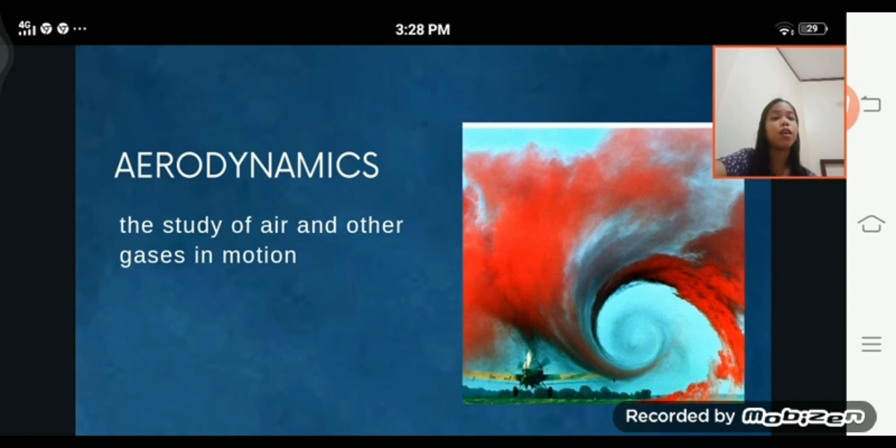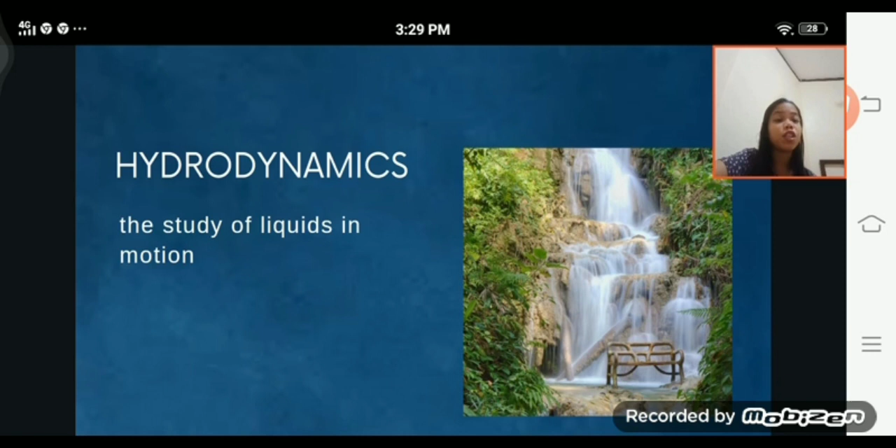Now we have the second one, hydrodynamics. It is the study of liquids in motion. As you can see in the picture, it is the study of liquids such as water in motion.

So now we have here flow, the term that physicists use to describe the physical properties of the movement of liquid. Since fluid dynamics involves the study of the motion of liquid, one of the first concepts that must be understood is how physicists quantify that movement.

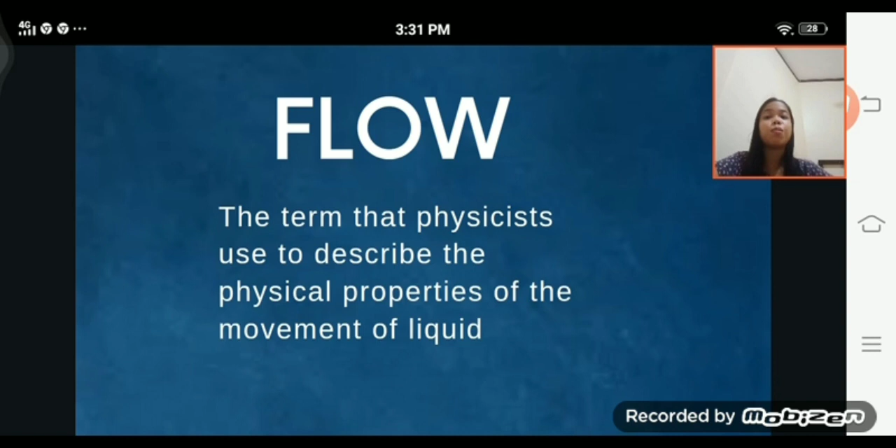Flow describes a wide range of fluid movements, such as blowing through the air, flowing through a pipe, or running along a surface. The flow of fluid is classified in a variety of different ways based upon the various properties of the flow.

We have here the first property, steady versus unsteady flow. When we say steady, if the movement of fluid does not change over time, it is considered a steady flow. This is determined by the situation where all properties of the flow remain constant with respect to time, or alternately can be described by saying that the time derivatives of the flow field vanish.

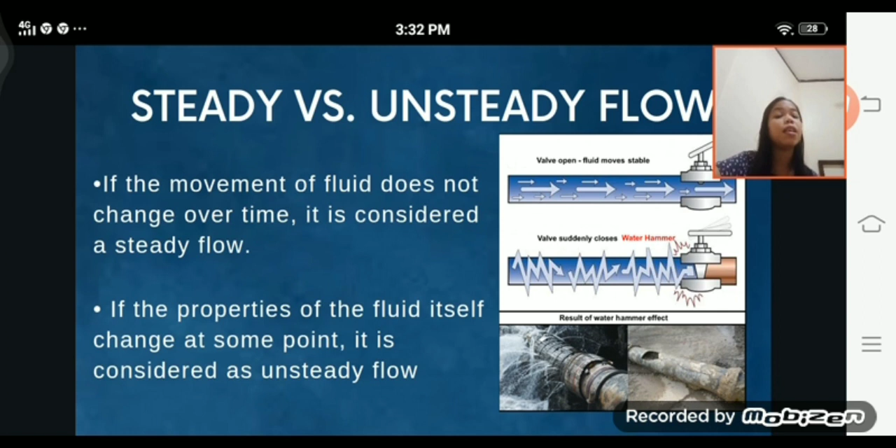If the properties of the fluid itself change at some point, it is considered unsteady flow. This is the opposite of steady flow.

Now we have the next, laminar flow versus turbulent flow. A smooth flow of liquid is said to have laminar flow. Flow that contains seemingly nonlinear motion is said to have turbulent flow.

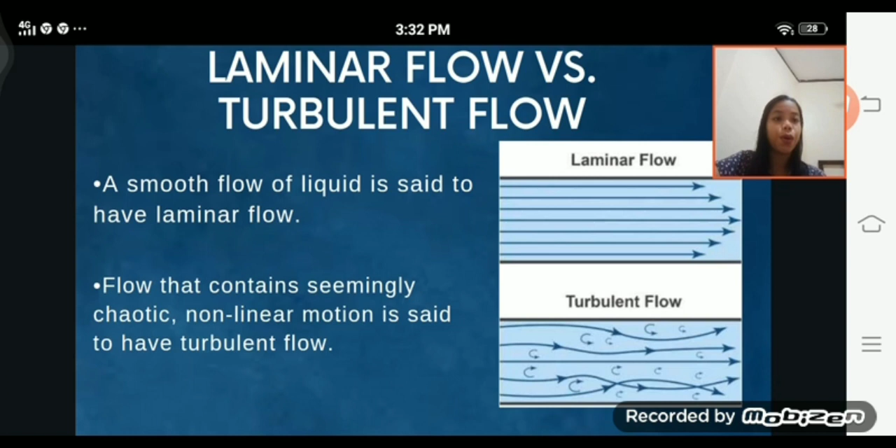Now we have pipe flow versus open channel flow. Pipe flow represents a flow that is in contact with rigid boundaries on all sides, such as water moving through a pipe or air moving through an air duct. Open channel flow describes flow in situations where there is at least one free surface that is not in contact with a rigid boundary.

Cases of open channel flow include water moving through a river, floods, water flowing during rain, tidal currents, and irrigation canals.

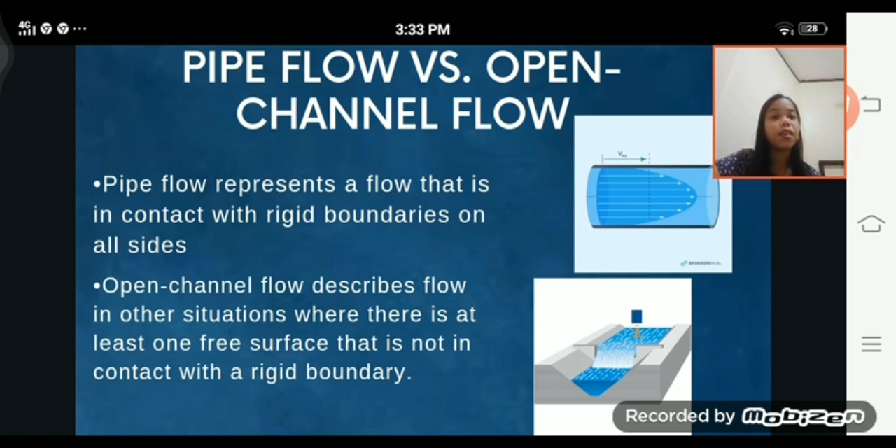Now we have compressible versus incompressible. A compressible fluid is one in which the fluid density changes when subjected to high pressure gradients. An incompressible fluid is a fluid which is not compressed or expanded, and its volume is always constant. As you can see in the picture, the liquid is an incompressible fluid, while the gas is a compressible fluid.

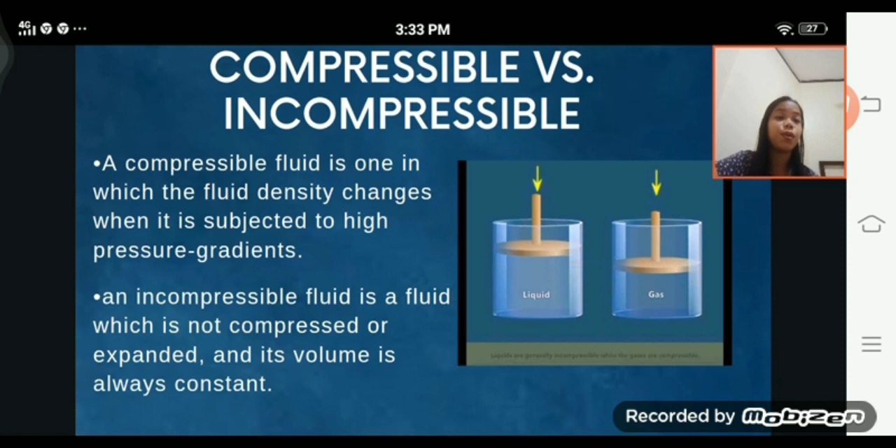Now let's proceed to the applications of fluid dynamics. Two-thirds of the Earth's surface is water, and the planet is surrounded by layers of atmosphere. So we are literally surrounded at all times by fluids, almost always in motion.

Here are the following applications of fluid dynamics: oceanography, meteorology, and climate science. Since the atmosphere is modeled as fluids, the study of atmospheric science and ocean currents, crucial for understanding and predicting weather patterns and climate trends, relies heavily on fluid dynamics.

Now we have aeronautics. The physics of fluid dynamics involves studying the flow of air to create drag and lift, which in turn generate the forces that allow heavier than air flight.

Next, we have geology and geophysics. Plate tectonics involves studying the motion of the heated matter within the liquid core of the Earth.

We have hematology and hemodynamics. The biological study of blood includes the study of its circulation through blood vessels, and the blood circulation can be modeled using the methods of fluid dynamics.

Now we have plasma physics. Though neither a liquid nor a gas, plasma often behaves in ways that are similar to fluids, so it can also be modeled using fluid dynamics.

Now we have astrophysics and cosmology. The process of stellar evolution involves the change of stars over time, which can be understood by studying how the plasma that composes the stars flows and interacts within the star over time.

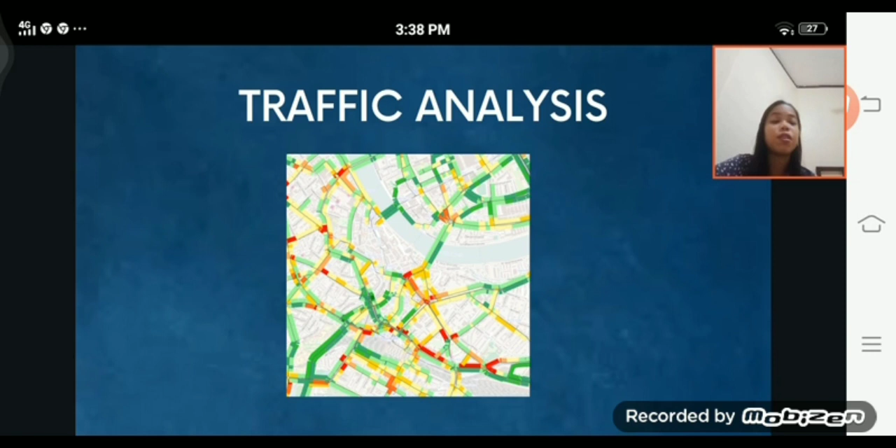Now let's proceed to Bernoulli's principle. Why do we need to learn Bernoulli's principle, and what is its connection to fluid dynamics? Bernoulli's principle, sometimes also called the Bernoulli effect, is one of the most important results in the study of fluid dynamics, relating the speed of the fluid flow to the fluid pressure. This might not seem particularly important, but given the huge range of phenomena it helps explain, this simple rule can reveal a lot about the behavior of a system.

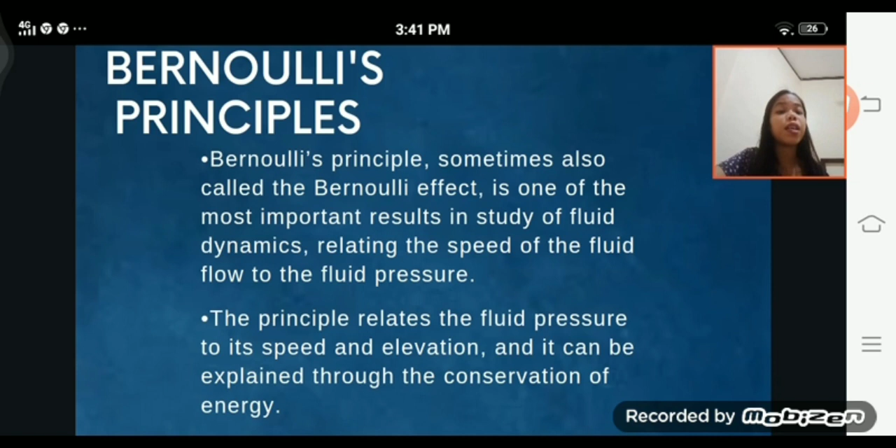Fluid dynamics is the study of moving fluid, so it makes sense that the principle and its accompanying equation, the Bernoulli equation, comes up quite regularly in the field. As I said earlier, Bernoulli's principle relates the fluid pressure, its speed, and elevation, and it can be explained through the conservation of energy.

Bernoulli's principle: within a horizontal flow of fluid, points of higher fluid speed will have less pressure than points of slower speed. So within a horizontal water pipe that changes diameter, regions where the water is moving fast will have less pressure than where the water is moving slow. This sounds counterintuitive to many people, since people associate high speeds with high pressure.

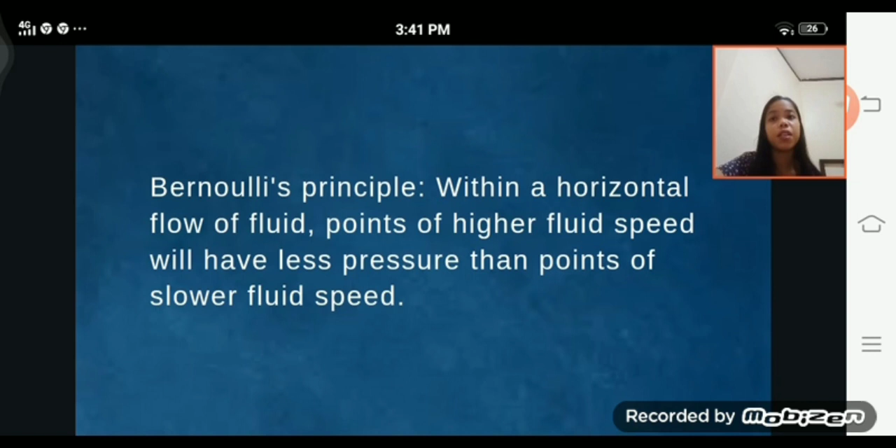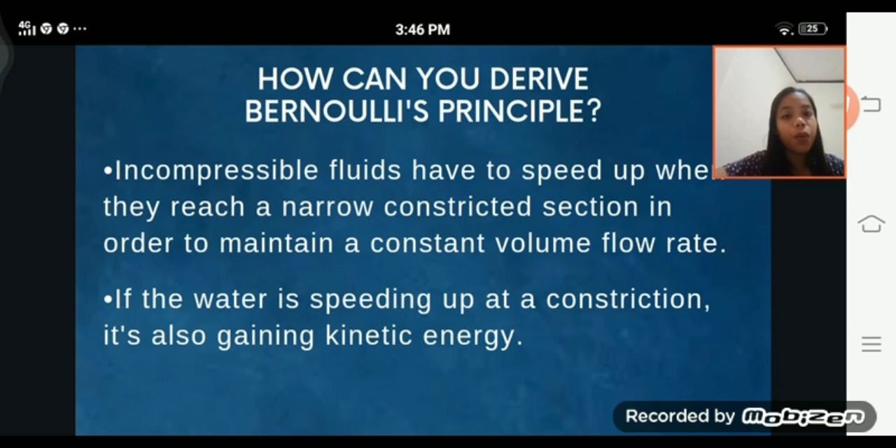Now let's talk about how you can derive Bernoulli's principle. Incompressible fluids have to speed up when they reach a narrow constricted section in order to maintain a constant volume flow rate. So if the water is speeding up at a constriction, it's also gaining kinetic energy, and the only way to give something kinetic energy is to do work on it. This is expressed by the work-energy principle.

Work external equals delta K equals one half mass times final velocity squared minus one half mass times initial velocity squared. So that's the work-energy principle.

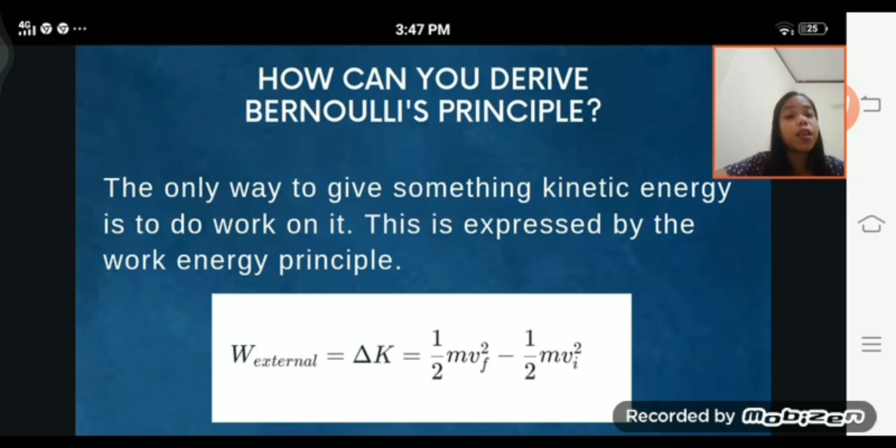So if a portion of fluid is speeding up, something external to that portion of fluid must be doing work. So what force is causing work to be done on the fluid? Consider the diagram below here.

The diagram below shows water flowing along streamlines from left to right. As the outlined volume of water enters the constricted region, it speeds up. The force from pressure 1 on the left side pushes the shaded water to the right and does positive work, since it pushes in the same direction as the motion of the shaded fluid.

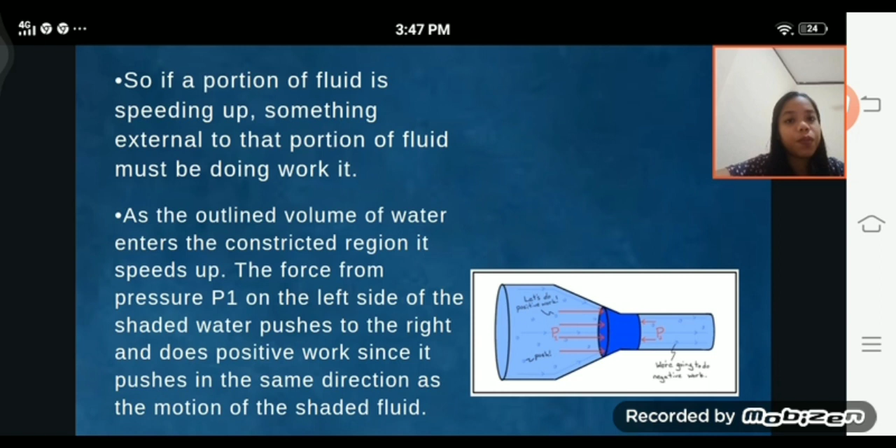Now let's proceed to what is Bernoulli's equation. Bernoulli's equation is essentially a more general and mathematical form of Bernoulli's principle that also takes into account changes in gravitational potential energy. We'll derive this equation in the next section, but before we do, let's take a look at Bernoulli's equation and get a feel for what it says and how we'd go about using it.

Bernoulli's equation relates the pressure, speed, and height of any 2 points in a steady, streamlined flowing fluid of density. It is usually written as: pressure 1 plus 1/2 density times velocity 1 squared plus density times g times height 1 equals pressure 2 plus 1/2 density times velocity 2 squared plus density times g times height 2.

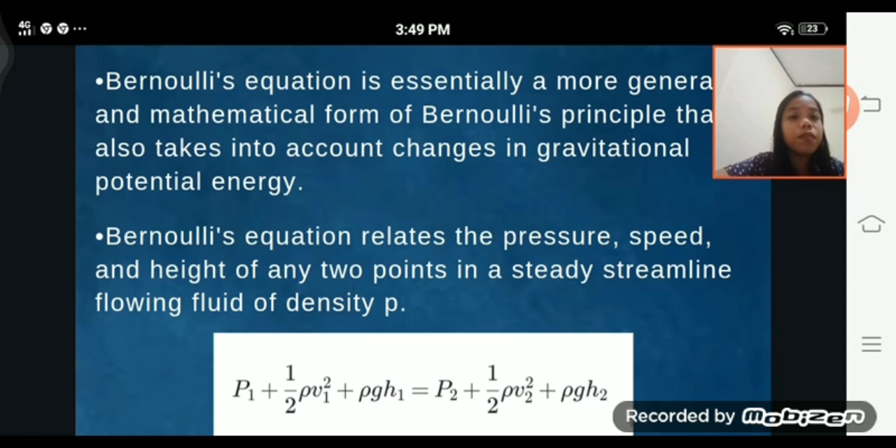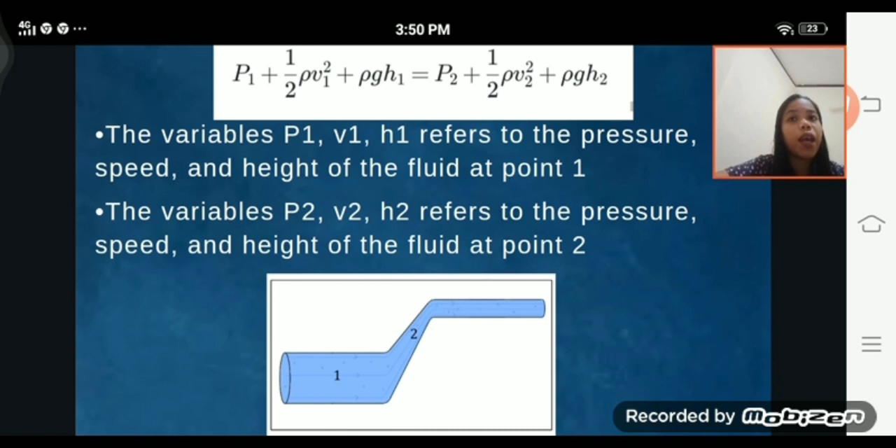The variables P1, V1, and height 1 refer to the pressure, speed, and height of the fluid at point 1. The variables P2, V2, and height 2 refer to the pressure, speed, and height of the fluid at point 2. The diagram below shows one particular choice of 2 points, 1 and 2, in the fluid, but Bernoulli's equation will hold for any 2 points in the fluid.

So when using Bernoulli's equation, how do you know where to choose your points? Note that h refers to the height of the fluid above an arbitrary level. Typically, it is often easiest to just choose the lower of the 2 points, 1 or 2, as the height where h equals 0.

The P pressures refer to the pressure at the point. You can choose to use gauge pressure or absolute pressure, but whichever kind of pressure you choose, gauge or absolute, must also be used on the other side of the equation.

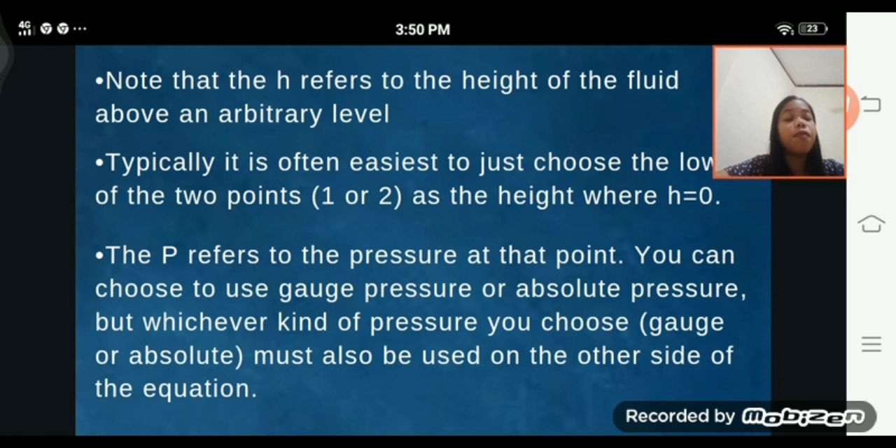The terms 1/2 times density times velocity squared, and density times g times h in Bernoulli's equation look just like kinetic energy, 1/2 m v squared, and potential energy, mgh, only with the mass m replaced by density ρ.

So now how do you derive Bernoulli's equation? Consider the following diagram, where water flows from left to right in a pipe that changes both area and height. As before, water will speed up and gain kinetic energy at constrictions in the pipe, since the volume flow rate must be maintained for an incompressible fluid, even if those constricted sections move upward.

But now, since the constriction also causes the fluid to move upward, the water will be gaining gravitational potential energy U as well as kinetic energy K. So we will derive Bernoulli's equation by setting the energy gained by the fluid equal to the external work done on the fluid.

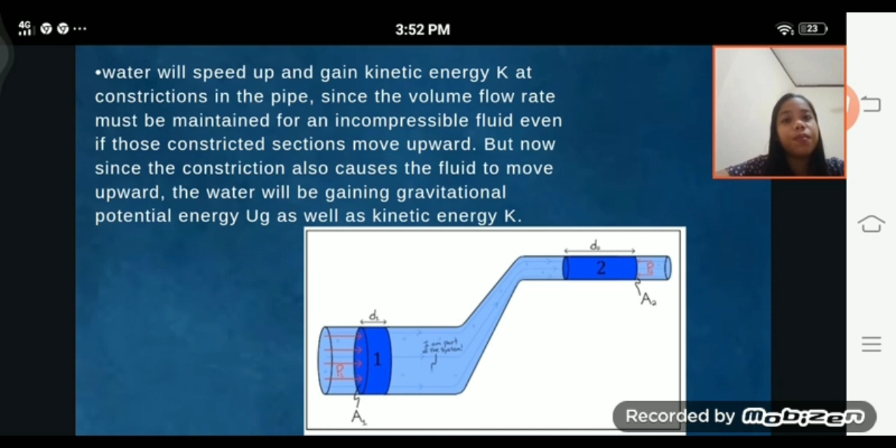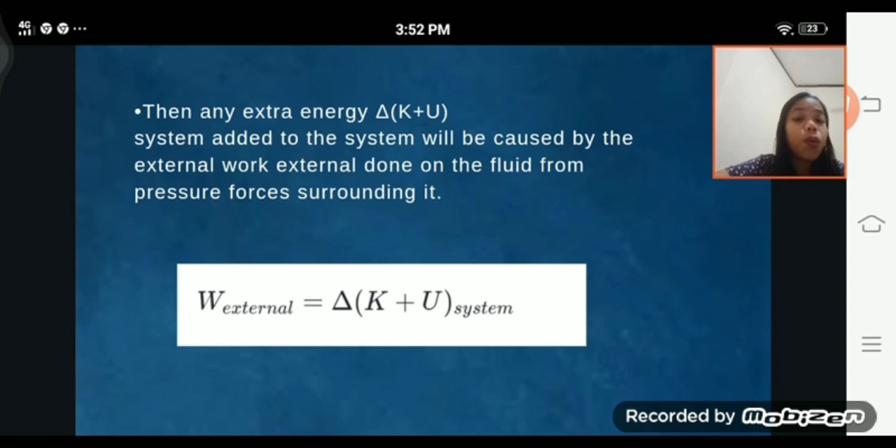Any extra energy, delta K plus U of the system, added to the system will be caused by the external work done on the fluid from the pressure forces surrounding it. So we will derive: work external equals delta K plus U system. Work can be found with work equals F times d.

We can plug in the formula for the force from pressure, F equals P times A, into the formula for work, to get work equals P times A times d. So the positive work done on our system by the water near point 1 will be work 1 equals pressure 1 times area 1 times d1, and the work done by the water near point 2 will be work 2 equals negative pressure 2 times area 2 times d2.

Plugging these expressions for work into the left side of our work-energy formula, work net equals delta K plus U system, we get: pressure 1 times area 1 times d1, minus pressure 2 times area 2 times d2, equals delta K plus U system.

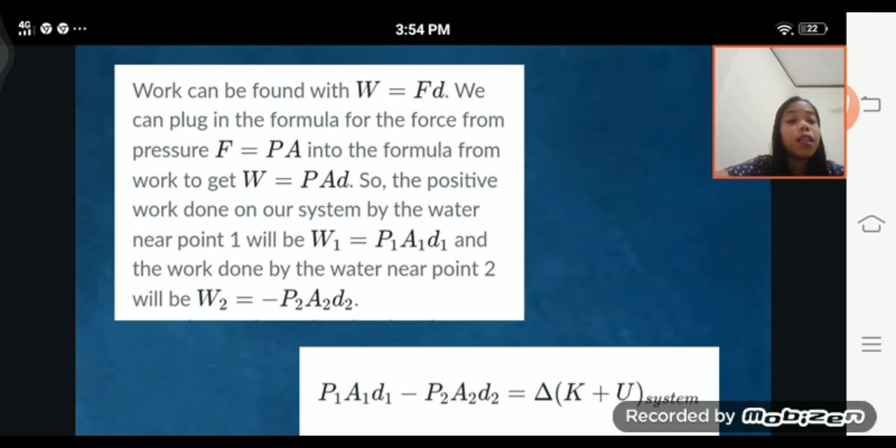But the terms A1D1 and A2D2 have to be equal since they represent the volumes of the fluid displaced near point 1 and point 2. If we assume the fluid is incompressible, an equal volume of fluid must be displaced everywhere in the fluid, including near the top. So how does the idea of steady flow help us figure out the change in energy of the big winding system of fluid?

Consider the diagram below. Our energy system consists of the grayed out fluid, volume 1, volume 2, and all the fluid in between. In the first image, the system has some amount of total K plus U initial. In the second image, the entire system had work done on it, gains energy, shifts to the right, and now has some different total energy, K plus U final.

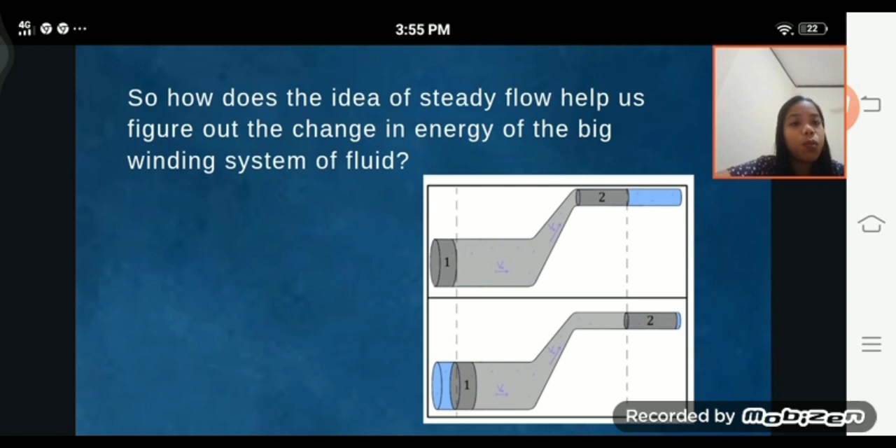But notice that the energy of the fluid between the dashed lines will be the same as it was before the work was done, assuming steady flow. Water changed position and speed in the region between the dashed lines, but it did so in such a way that it will be moving with the exact same speed and have the same height as the previous water had in that location. The only thing that's different about our system is that volume 2 now extends into a section of the pipe it wasn't in previously, and now nothing in our system is occupying the old position behind volume 1. So overall, this means that the total change in the energy of the system can be found by simply considering the energies of the endpoints.

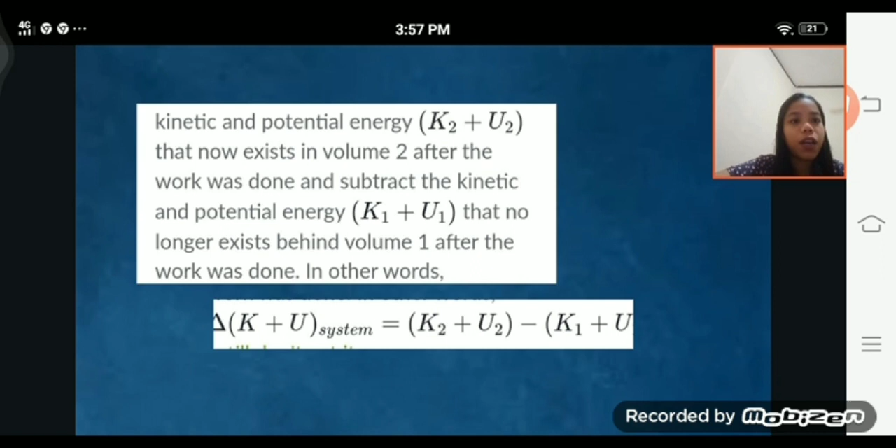Namely, we can take the kinetic and potential energy, K2 plus U2, that now exists in volume 2 after the work was done, and subtract the kinetic and potential energy, K1 plus U1, that no longer exists behind volume 1 after the work was done. In other words, delta K plus U system equals K2 plus U2 minus K1 plus U1, since we subtract the kinetic and potential energy. So plugging this into the right hand side of the work energy formula, pressure 1 times volume minus pressure 2 times volume equals delta K plus U system, we get pressure 1 times volume minus pressure 2 times volume equals K2 plus U2 minus K1 plus U1.

So now we'll substitute the formulas for kinetic energy. K equals 1/2 mass times velocity squared, and gravitational potential energy U_G equals mgh, to get: pressure 1 times volume minus pressure 2 times volume equals 1/2 mass 2 times V2 squared plus mass 2 times g times height 2, minus 1/2 mass 1 times V1 squared plus mass 1 times g times height 1.

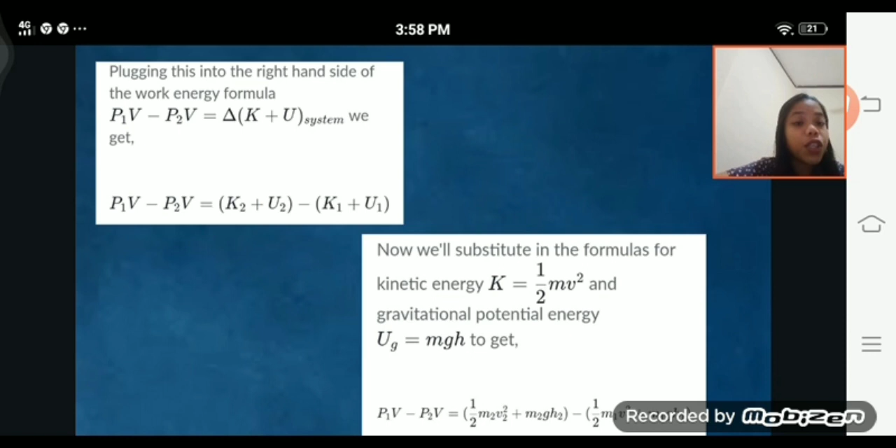Now we can divide both sides by V and drop the parentheses to get P1 minus P2 equals 1/2 times m times V2 squared over V plus mgh2 over V, minus 1/2 times m times V1 squared over V minus mgh1 over V.

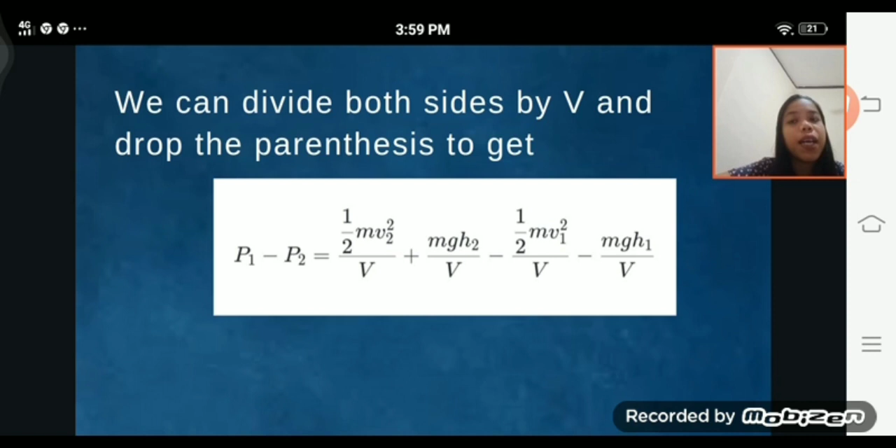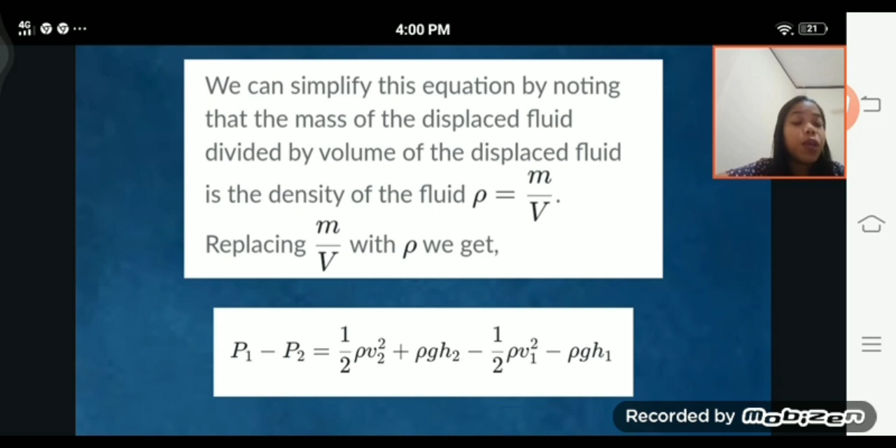Now we're just going to rearrange the formula using algebra to put all the terms that refer to the same point in space on the same side of the equation, to get: pressure 1 plus 1/2 rho V1 squared plus rho g h1 equals P2 plus 1/2 rho V2 squared plus rho g h2. And there it is — finally, this is Bernoulli's equation. It says that if you add up the pressure, plus the kinetic energy density 1/2 rho V squared, plus the gravitational potential energy density rho g h, at any two points in a streamline, they will be equal.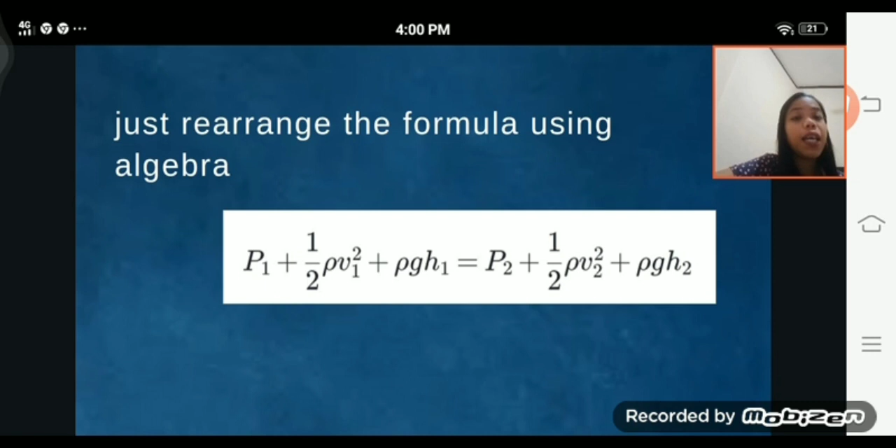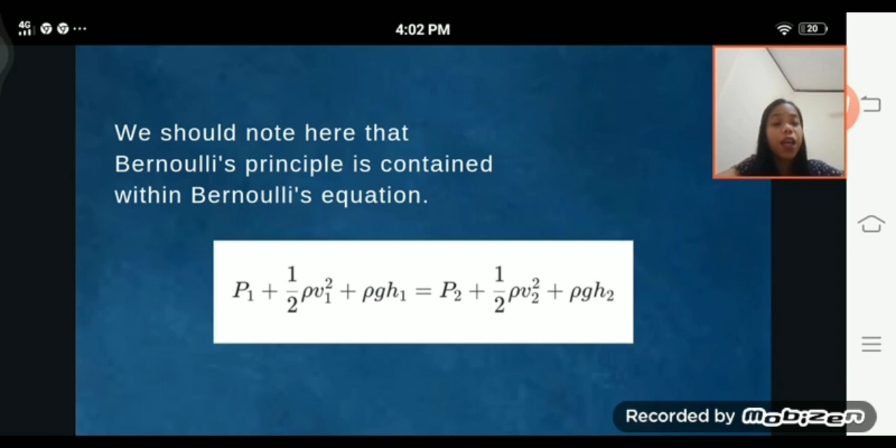Now let's talk about how Bernoulli's principle is a result of Bernoulli's equation. We should note here that Bernoulli's principle is contained within Bernoulli's equation: P1 plus 1/2 rho V1 squared plus rho g h1 equals P2 plus 1/2 rho V2 squared plus rho g h2. Assume that there is no change in the height of the fluid — the rho g h terms cancel if you subtract them from both sides. So P1 plus 1/2 rho V1 squared equals P2 plus 1/2 rho V2 squared, or we could write it as pressure plus 1/2 density times velocity squared is a constant.

This formula highlights Bernoulli's principle, since if the speed of a fluid is larger in a given region of streamline flow, the pressure P must be smaller in that region. So an increase in speed V must be accompanied by a simultaneous decrease in pressure P in order for the sum to always add up to the same constant number.

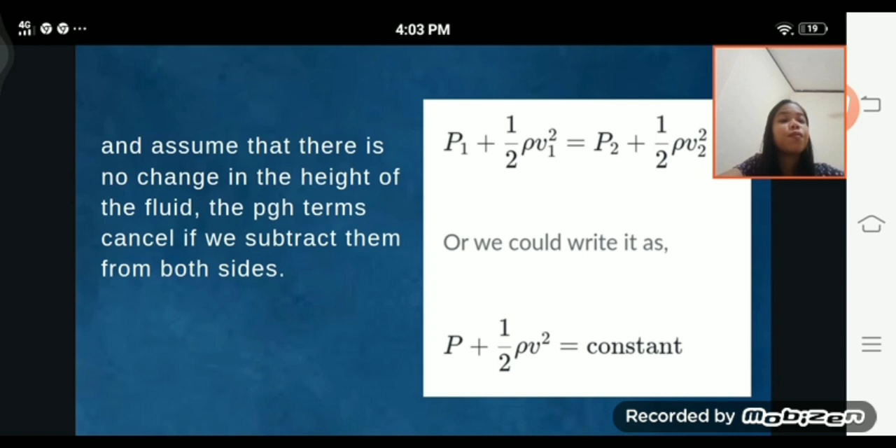So I have here the sample problem, let's compute it. You own a restaurant that is investigating new ways to deliver beverages to customers. One proposal is for a tube that will deliver root beer of density 1090 kg per cubic meter throughout the restaurant. A section of the tube is shown below.

The blueprint says that the speed and gauge pressure of the root beer at point 1 are 3 meters per second and 12,300 Pa respectively. The root beer at point 2 is 1.20 meters higher than the fluid at point 1 and is traveling at a speed of 0.750 meters per second. You can't make out the number on the blueprint for the pressure at point 2, so we need to find the pressure at point 2.

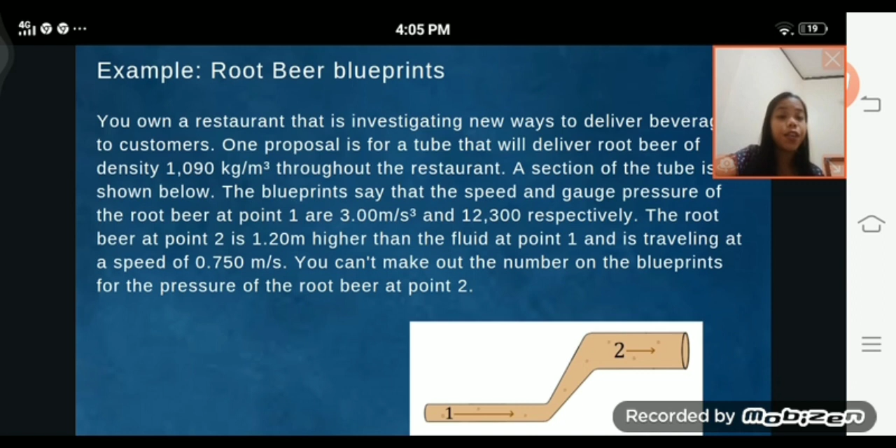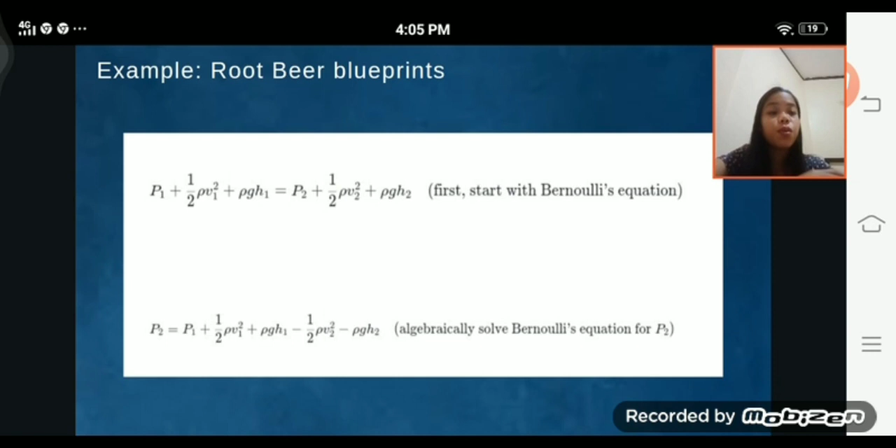Here's the solution. Start with Bernoulli's equation: pressure 1 plus 1/2 density times velocity 1 squared plus density times g times height 1 equals pressure 2 plus 1/2 density times velocity 2 squared plus density times g times height 2. Algebraically solve Bernoulli's equation for pressure 2, so we're going to use this formula: pressure 2 equals pressure 1 plus 1/2 density times velocity 1 squared plus density times g times height.

The height 1 is 0 meters, minus 1/2 times density times velocity 2 squared, minus density times g times height 2, which is 1.2 meters. So we plug in the values of H1 and H2.

So pressure 2 equals: pressure 1 is 12,300 Pa, plus 1/2 times the density of 1090 kg per cubic meter times the velocity of 3.0 meters per second squared, minus 1/2 times the density 1090 kg per cubic meter times the velocity 0.750 meters per second squared, minus the density again 1090 kg per cubic meter times g times the height 1.20 meters.

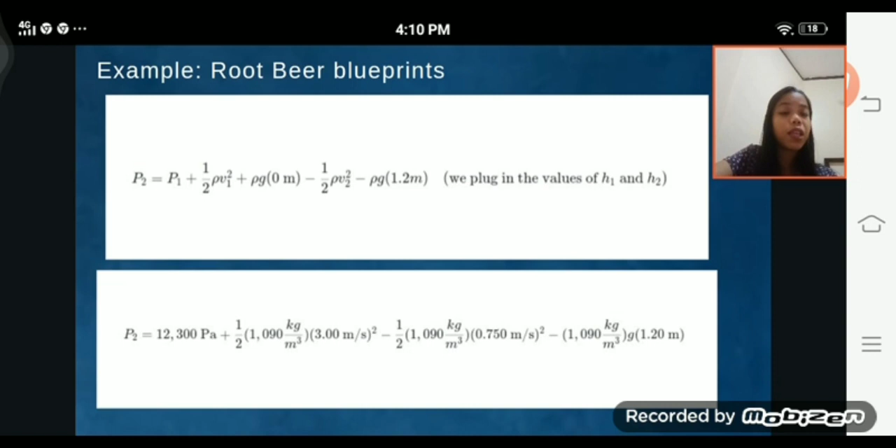So we will derive this answer: pressure 2 equals 4080 Pa.

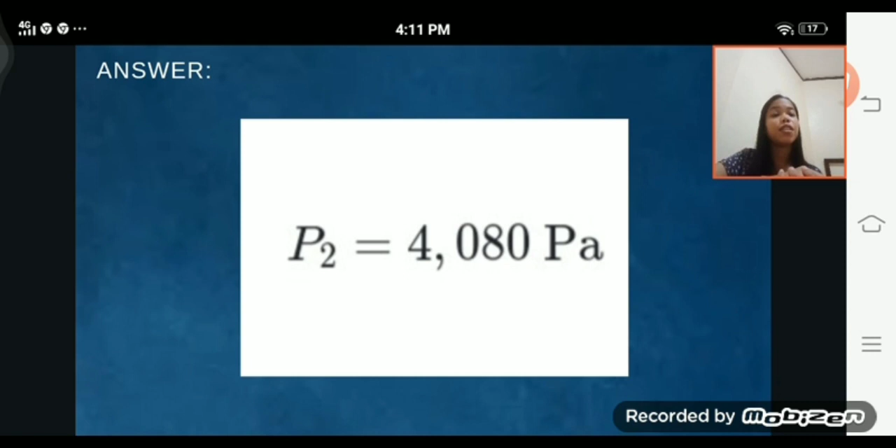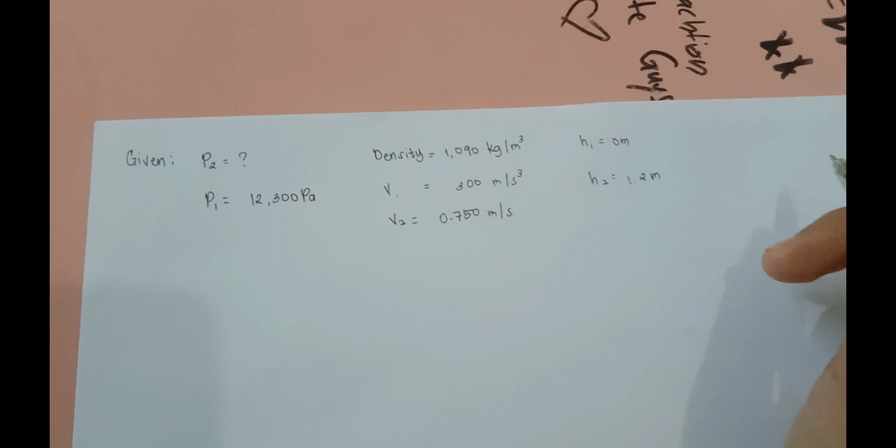So hello, this is the proper calculation of the sample problem I gave earlier in the PPT. I'm gonna show you guys how to solve this in a proper way. So I have here the given.

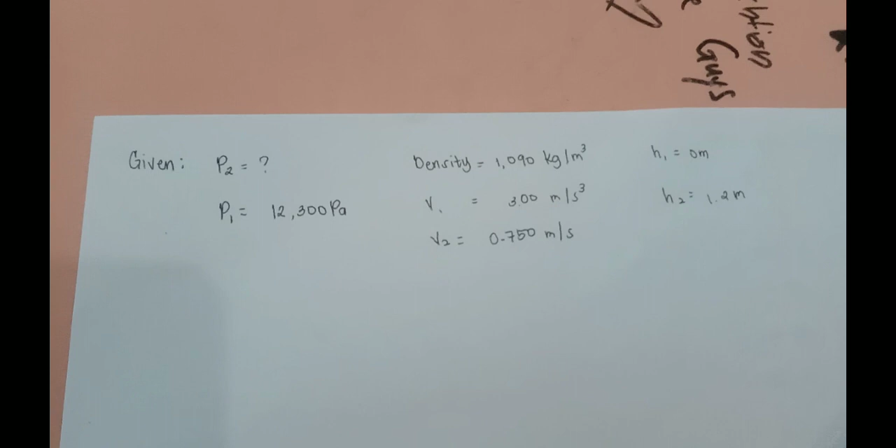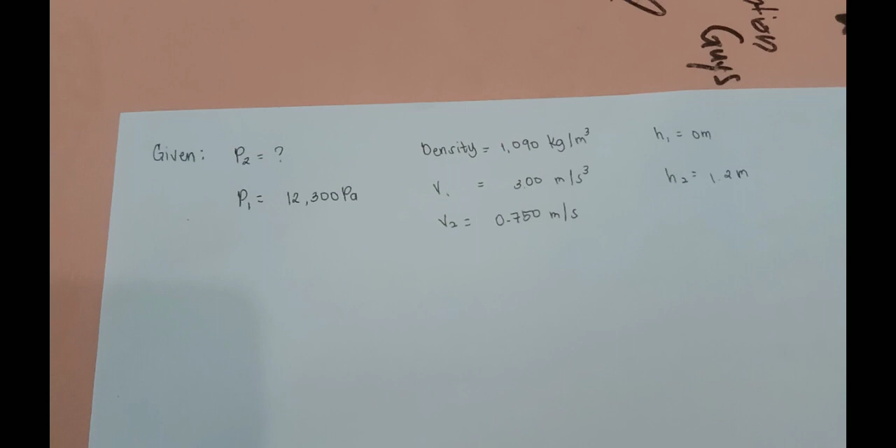We have here the pressure, and what we are looking for is pressure 2. So pressure 1 is 12,300 Pa, the density is 1,090 kg per cubic meter, velocity 1 is 3 meters per second, velocity 2 is 0.750 meters per second, height 1 is 0 meters, and height 2 is 1.2 meters.

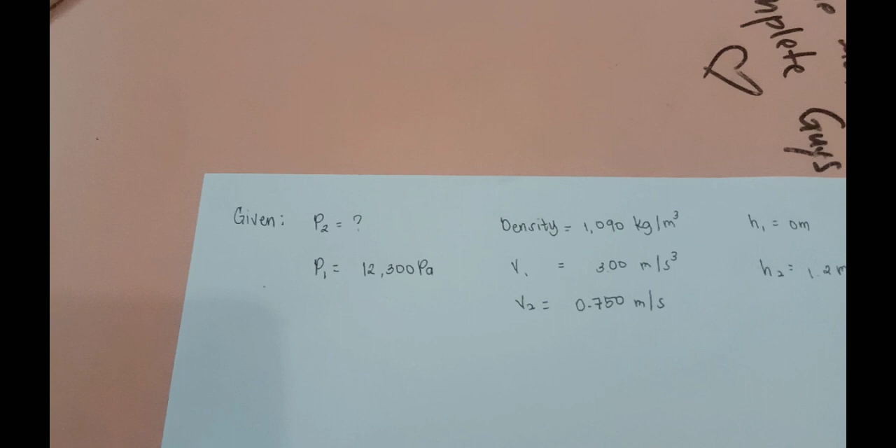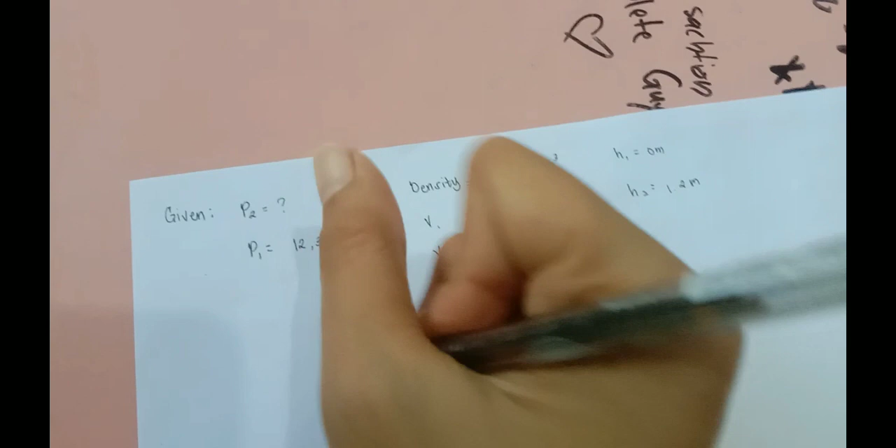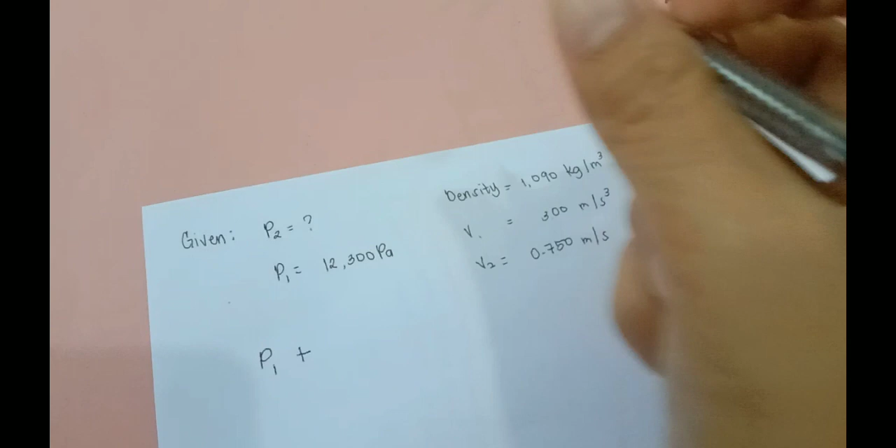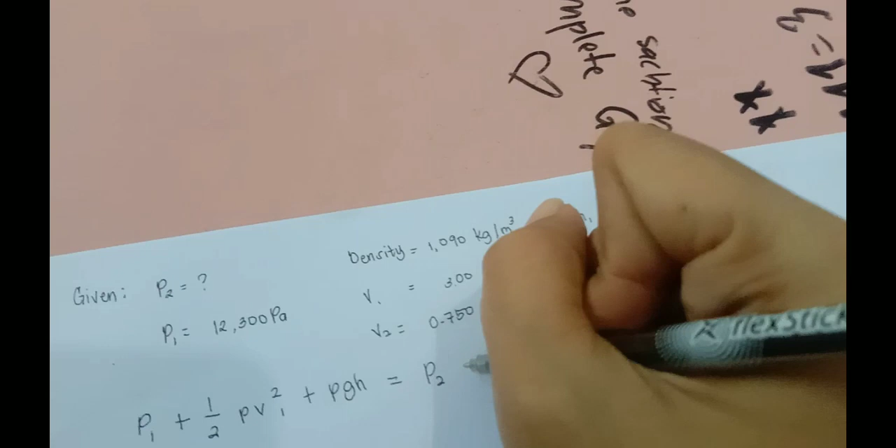So we're gonna use the Bernoulli's principle. We have P1 plus 1/2 density times velocity 1 squared plus density times g times height 1 equals P2 plus 1/2 density times velocity 2 squared plus density times g times height 2. So we're gonna substitute this.

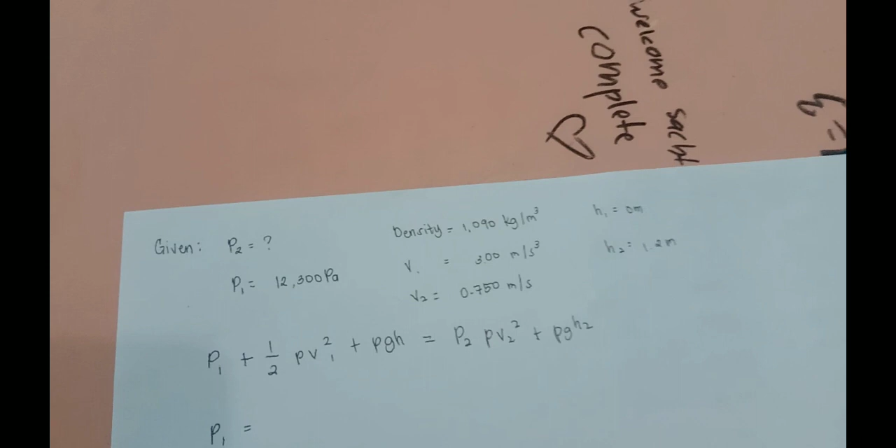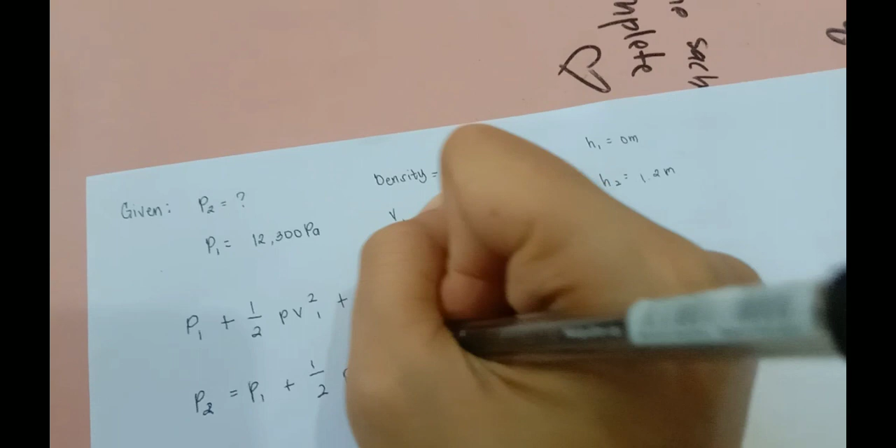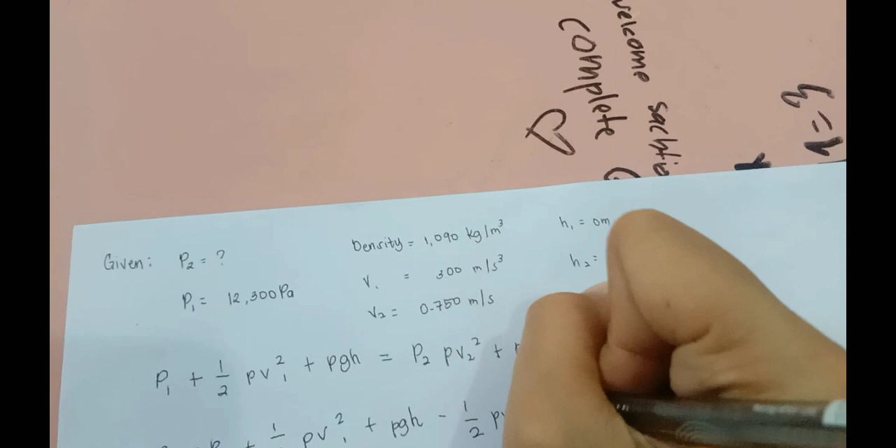We have P1, and we're gonna arrange this algebraically: P1 plus 1/2 density velocity 1 plus density g height 1, minus 1/2 density velocity 2, minus density g height 2. So we're gonna solve this, we have here P2.

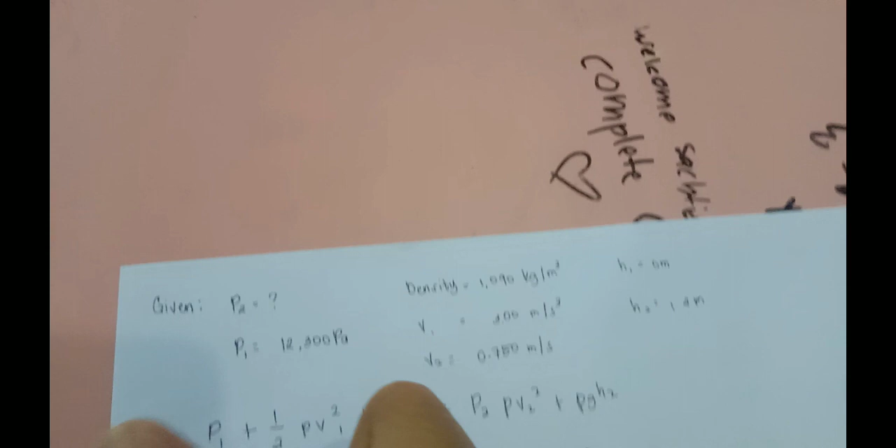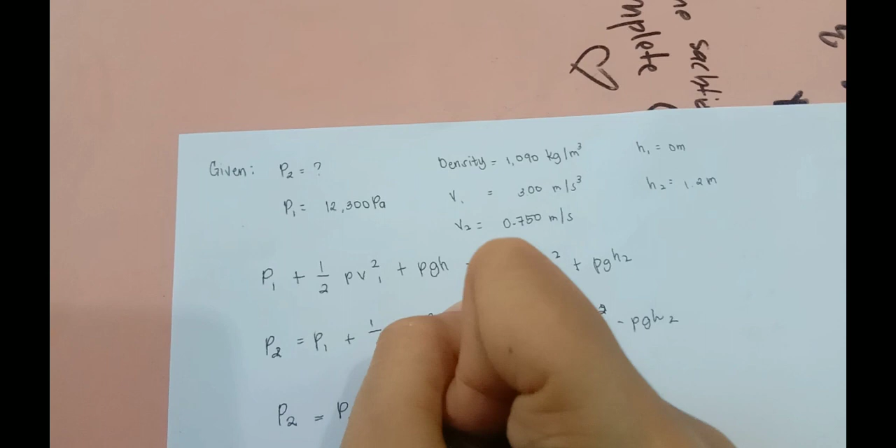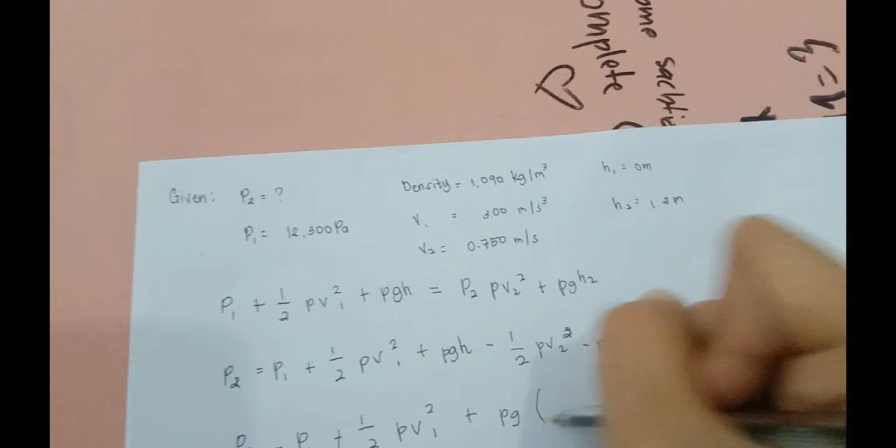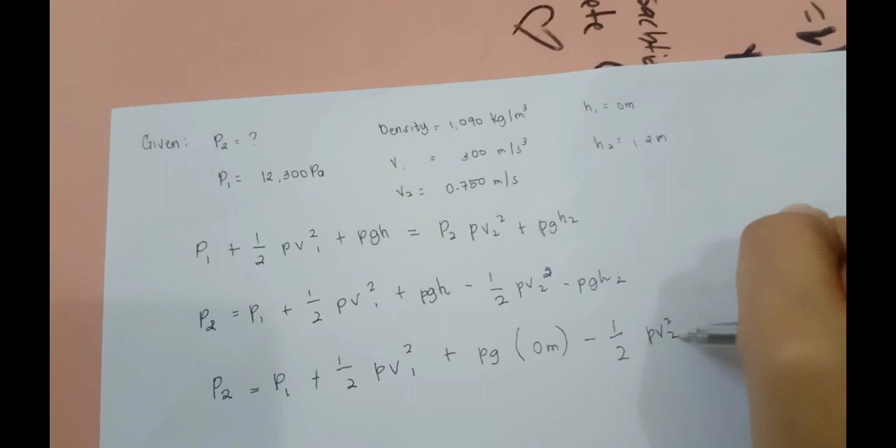So that's P2 equals P1 plus 1/2 density times velocity 1 squared plus density times g, our height is 0 meters for height 1, minus 1/2 density times velocity 2 squared, minus density times g, and height 2 is 1.2 meters.